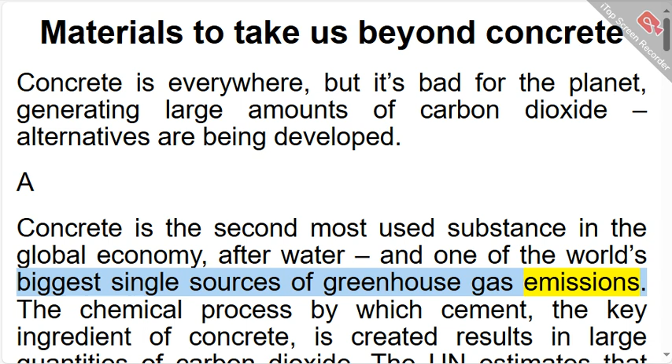Alternatives are being developed. Concrete is the second most used substance in the global economy, after water, and one of the world's biggest single sources of greenhouse gas emissions. The chemical process by which cement, the key ingredient of concrete, is created results in large quantities of carbon dioxide. The UN estimates that there will be 9.8 billion people living on the planet by mid-century. They will need somewhere to live. If concrete is the only answer to the construction of new cities, then carbon emissions will soar, aggravating global warming.

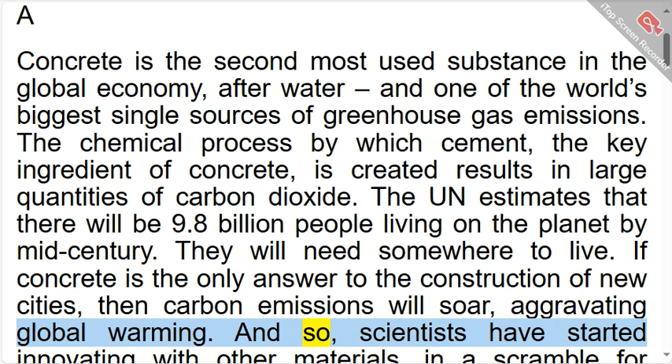And so, scientists have started innovating with other materials, in a scramble for alternatives to a universal commodity that has underpinned our modern life for many years.

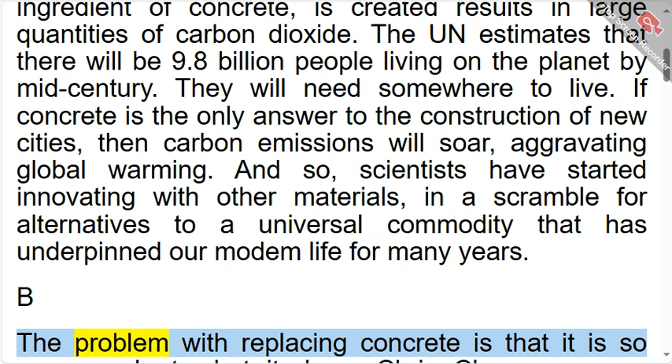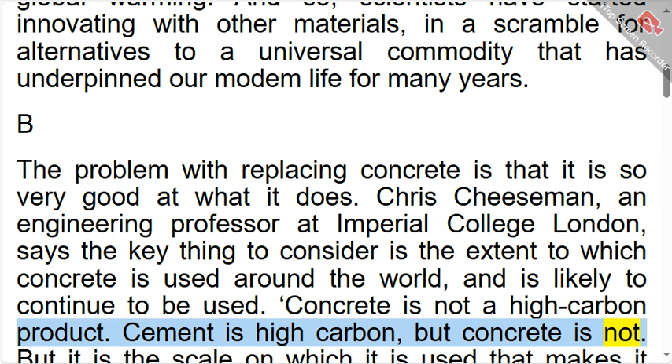The problem with replacing concrete is that it is so very good at what it does. Chris Cheeseman, an engineering professor at Imperial College London, says the key thing to consider is the extent to which concrete is used around the world, and is likely to continue to be used. Concrete is not a high-carbon product. Cement is high carbon, but concrete is not. But it is the scale on which it is used that makes it high carbon. The sheer scale of manufacture is so huge, that is the issue.

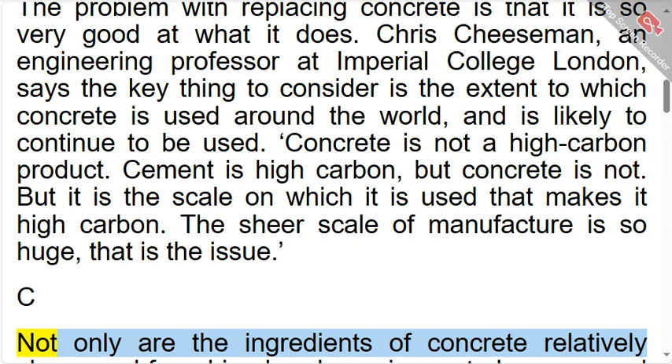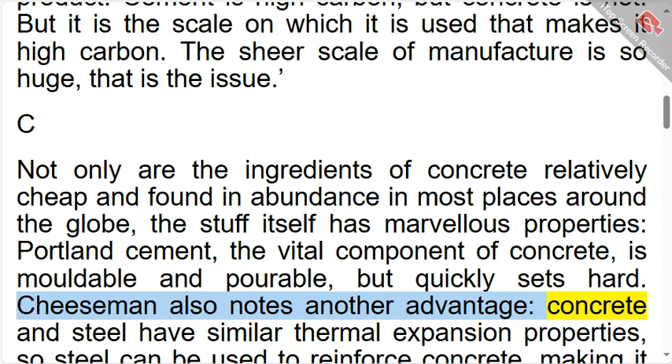Not only are the ingredients of concrete relatively cheap and found in abundance in most places around the globe, the stuff itself has marvelous properties. Portland cement, the vital component of concrete, is moldable and pourable, but quickly sets hard. Cheeseman also notes another advantage: concrete and steel have similar thermal expansion properties, so steel can be used to reinforce concrete, making it far stronger and more flexible as a building material than it could be on its own.

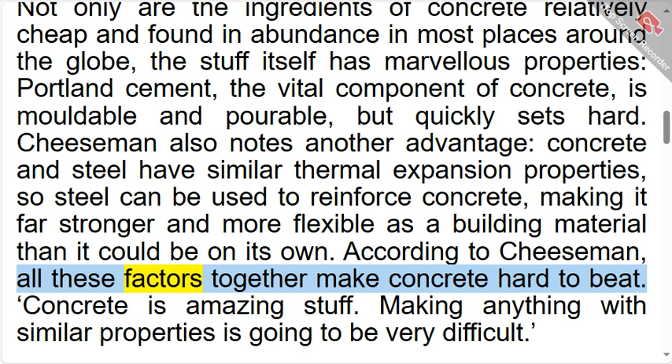According to Cheeseman, all these factors together make concrete hard to beat. Concrete is amazing stuff. Making anything with similar properties is going to be very difficult.

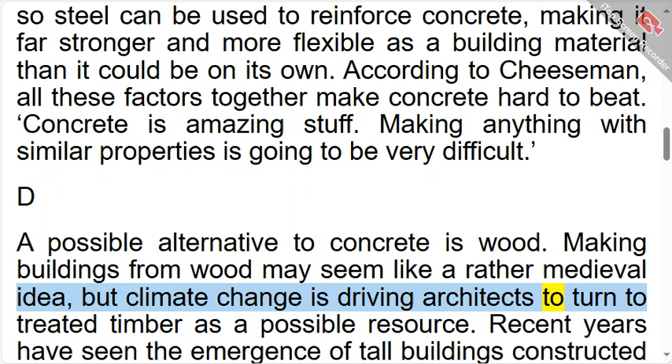A possible alternative to concrete is wood. Making buildings from wood may seem like a rather medieval idea, but climate change is driving architects to turn to treated timber as a possible resource. Recent years have seen the emergence of tall buildings constructed almost entirely from timber. Vancouver, Vienna, and Brumunddal in Norway are all home to constructed tall, wooden buildings.

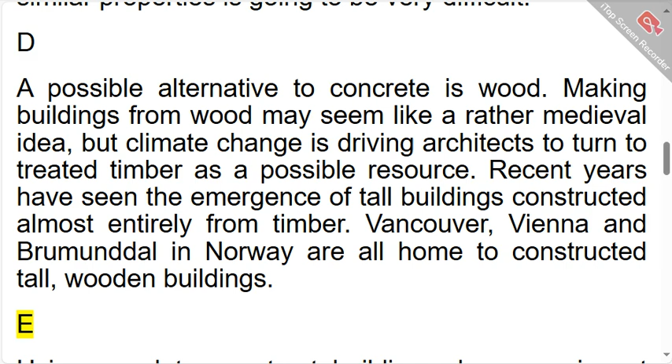Using wood to construct buildings, however, is not straightforward. Wood expands as it absorbs moisture from the air and is susceptible to pests, not to mention fire. But treating wood and combining it with other materials can improve its properties.

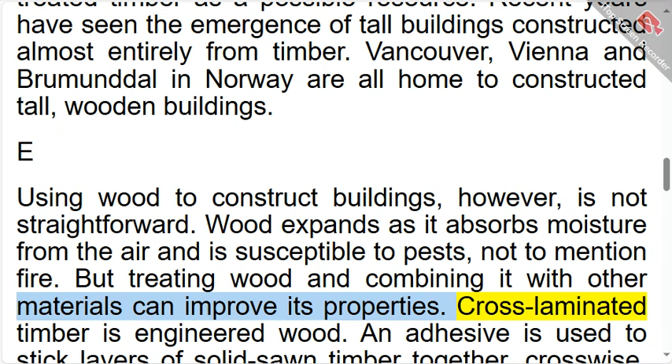Cross-laminated timber is engineered wood. An adhesive is used to stick layers of solid sawn timber together, crosswise, to form building blocks. This material is light but has the strength of concrete and steel. Construction experts say that wooden buildings can be constructed at a greater speed than ones of concrete and steel, and the process, it seems, is quieter.

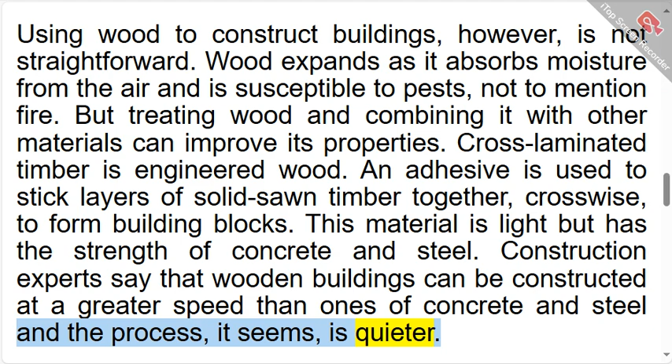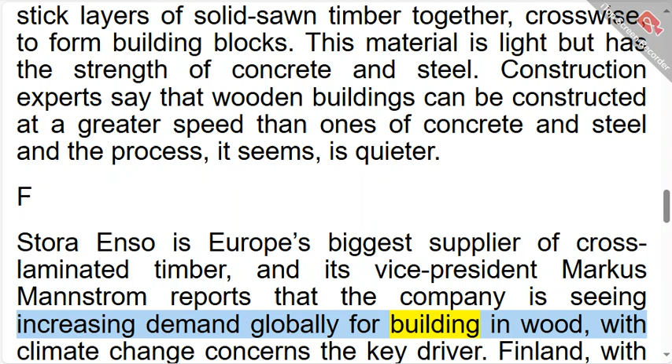Stora Enso is Europe's biggest supplier of cross-laminated timber, and its vice president Markus Mannstrom reports that the company is seeing increasing demand globally for building in wood, with climate change concerns the key driver. Finland, with its large forests, where Stora Enso is based, has been leading the way, but the company is seeing a rise in demand for its timber products across the world, including in Asia.

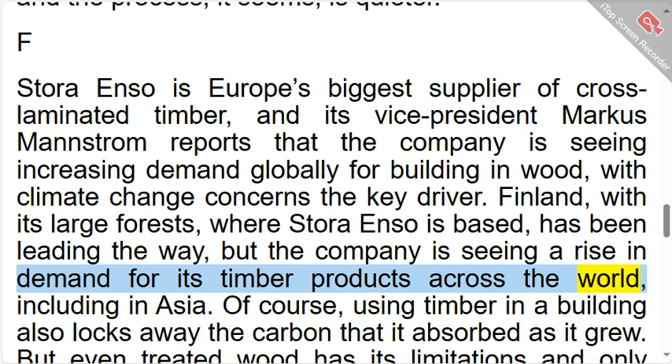Of course, using timber in a building also locks away the carbon that it absorbed as it grew. But even treated wood has its limitations, and only when a wider range of construction projects has been proven in practice will it be possible to see wood as a real alternative to concrete in constructing tall buildings.

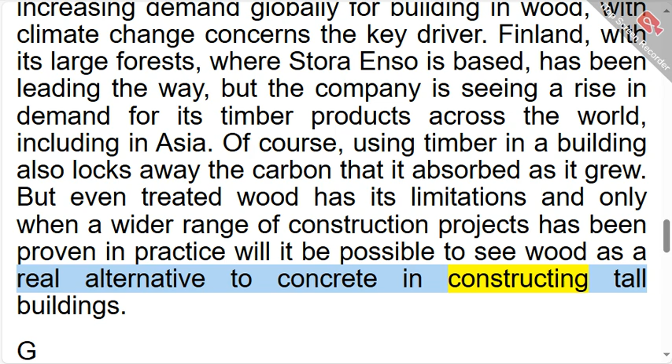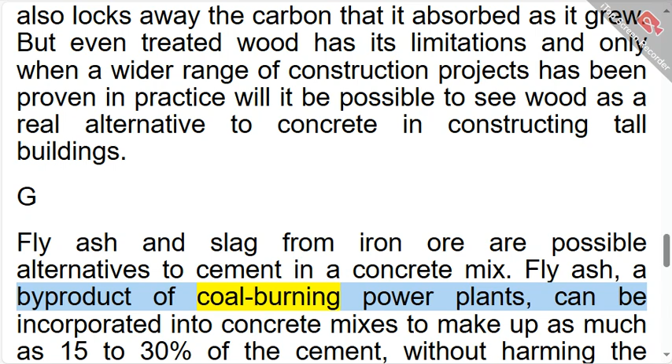Fly ash and slag from iron ore are possible alternatives to cement in a concrete mix. Fly ash, a byproduct of coal-burning power plants, can be incorporated into concrete mixes to make up as much as 15 to 30% of the cement, without harming the strength or durability of the resulting mix. Iron ore slag, a byproduct of the iron ore smelting process, can be used in a similar way. Their incorporation into concrete mixes has the potential to reduce greenhouse gas emissions.

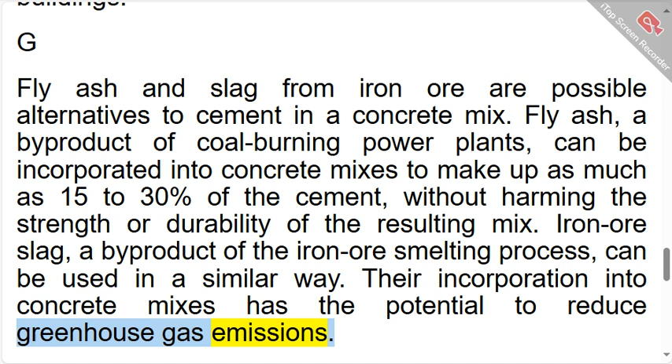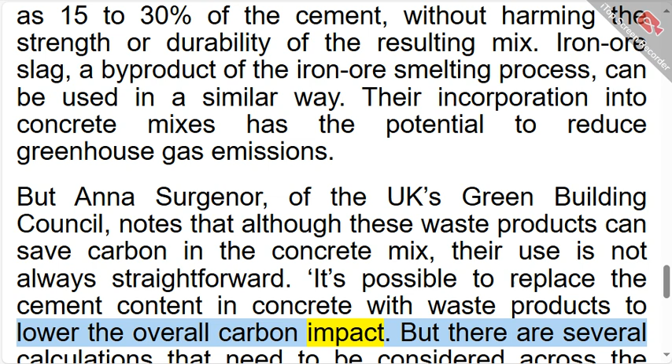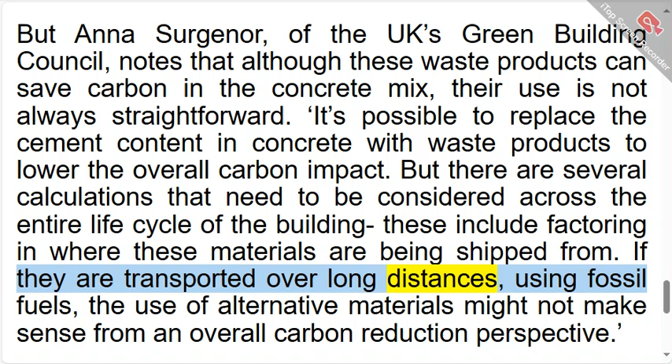But Anna Surgenor, of the UK's Green Building Council, notes that although these waste products can save carbon in the concrete mix, their use is not always straightforward. It's possible to replace the cement content in concrete with waste products to lower the overall carbon impact. But there are several calculations that need to be considered across the entire life cycle of the building. These include factoring in where these materials are being shipped from. If they are transported over long distances using fossil fuels, the use of alternative materials might not make sense from an overall carbon reduction perspective.

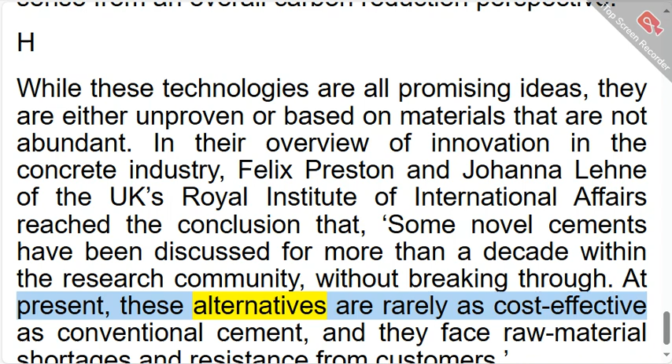While these technologies are all promising ideas, they are either unproven or based on materials that are not abundant. In their overview of innovation in the concrete industry, Felix Preston and Johanna Lehne of the UK's Royal Institute of International Affairs reached the conclusion that some novel cements have been discussed for more than a decade within the research community, without breaking through. At present, these alternatives are rarely as cost-effective as conventional cement, and they face raw material shortages and resistance from customers.